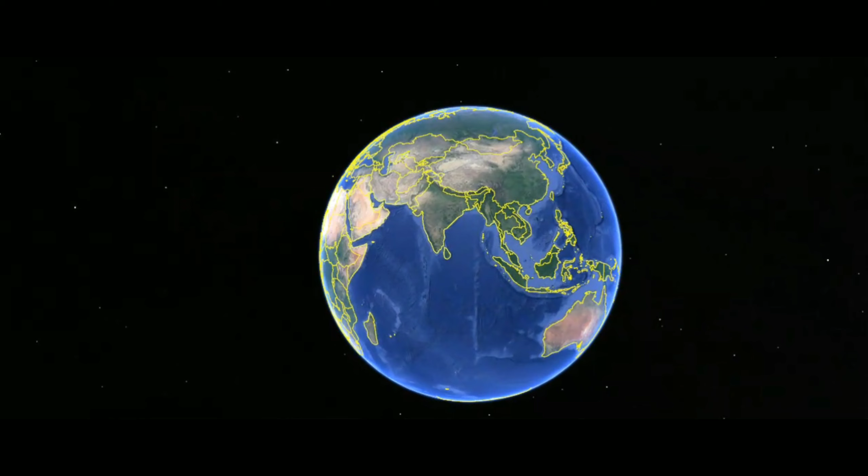Today I am coming with a new update, the 12,000 crore Surat Metro project. Before going to the project, let's know about Surat city. Surat is located in the western part of Gujarat, and it is the second largest city in Gujarat after Ahmedabad. It is the 8th largest city in India by population. Surat is also called the economic powerhouse of Gujarat. The economy is based mainly on two industries: number 1, textile industry, and number 2, diamond cutting and polishing industry. As per 2011 census data, the Surat population was 44.67 lakh, but it officially reached 69.36 lakh in 2021.

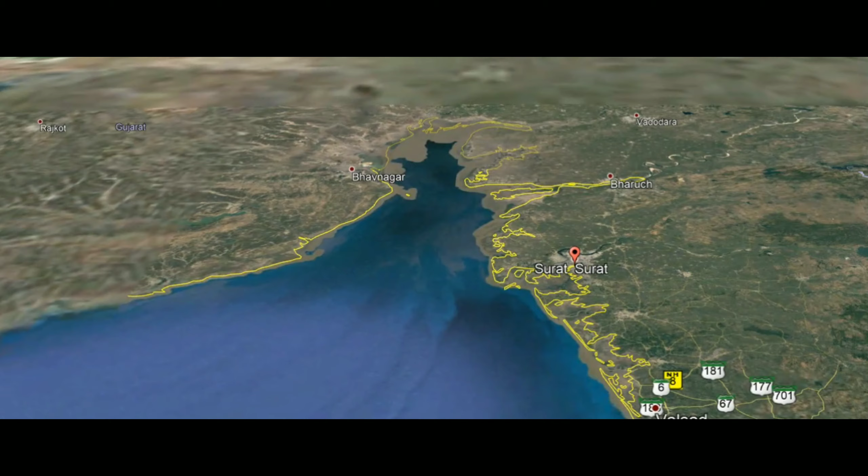The area containing Surat was 326.515 square kilometers. The population density was 13,680 persons per square kilometer, and Surat is one of the fast growing cities in India. It contains 7 zones, 29 wards, and 116 councillors.

Now let's know about the Surat Metro project. On 18 January 2021, Prime Minister Narendra Modi inaugurated the foundation stone virtually.

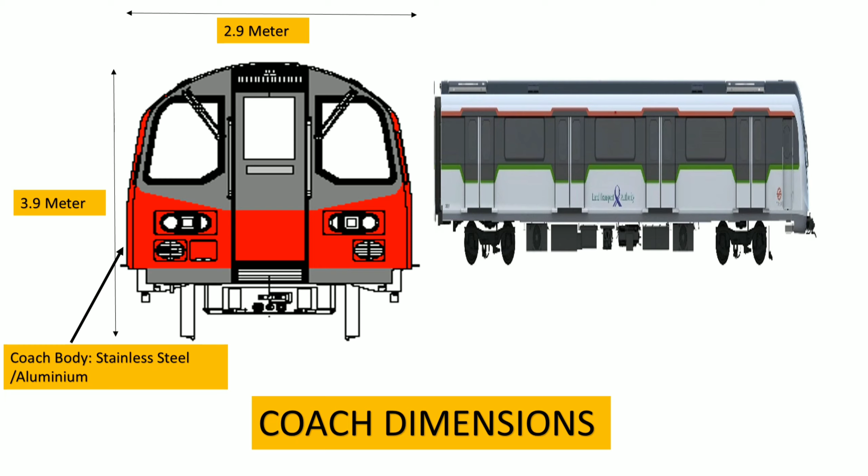Now let's go into the project features. Starting with the coach dimensions of the metro rail: 3.9 meters height and 2.9 meters width, and the length will be 21.64 meters or 21.34 meters. The coach body will be made either of stainless steel or aluminium.

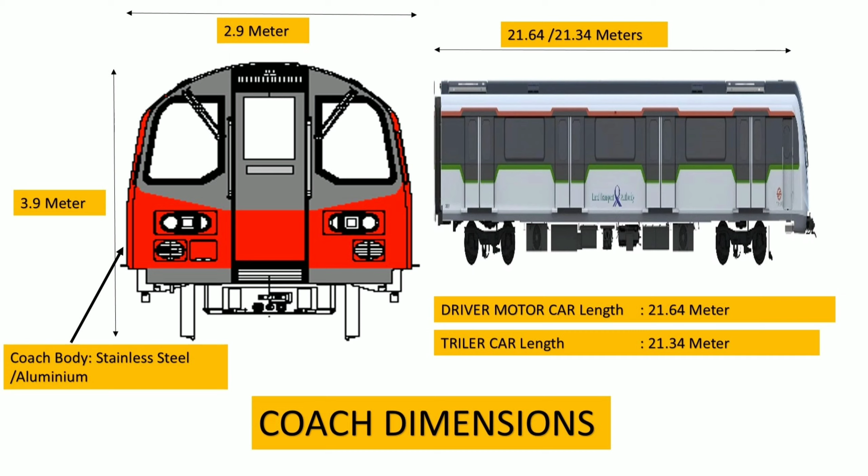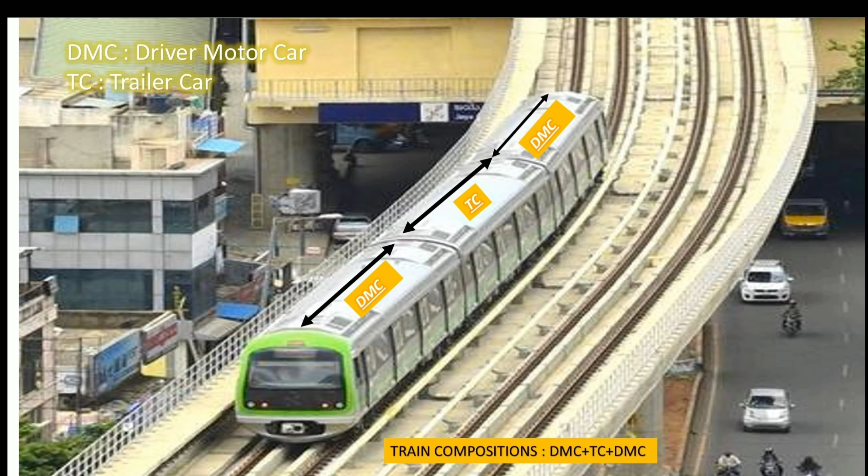Coming to the axle load capacity of the coach, it will be 16 tons. The train composition will mainly be 3 cars: 2 DMCs and 1 TC. DMC is nothing but driver motor car, and TC is the trailer car.

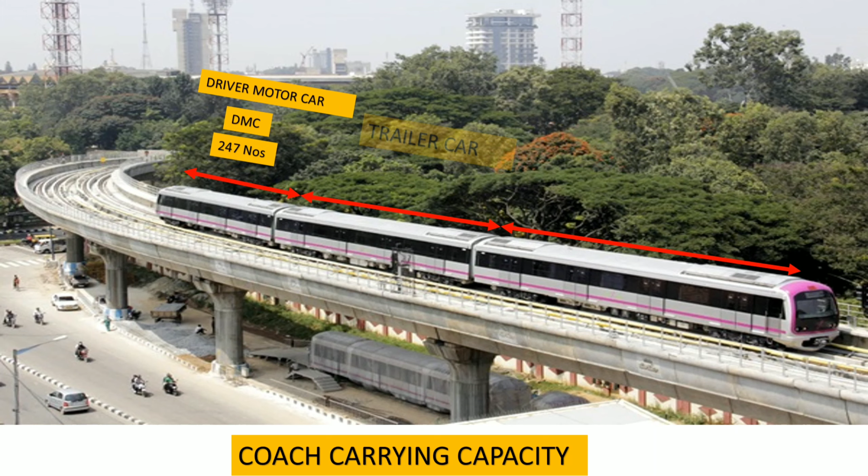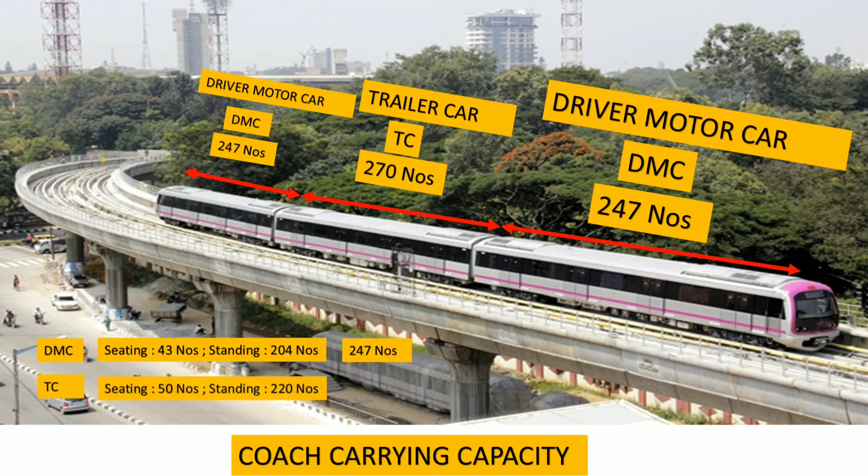Coming to coach carrying capacity, the DMC will carry 247 passengers, including 43 sitting and 204 standing. Similarly, the trailer car capacity will be 270, with 50 sitting and 220 standing.

The gauge involved in this project is standard gauge of length 1.435 meters. The total capacity of passengers in 3 coaches will be 764 numbers, including 136 sitting and 628 standing.

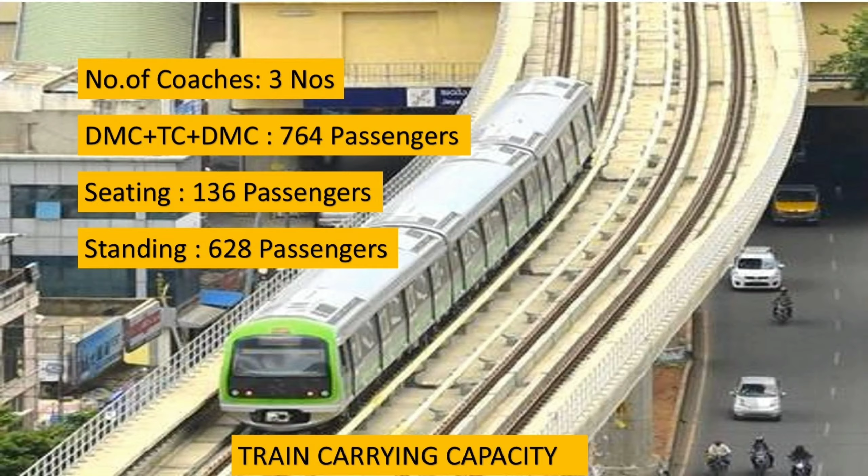Coming to the train speed, the maximum design speed will be 90 kmph and the maximum operational speed will be 80 kmph, but the scheduled speed will be 33 kmph for the entire project. Station dwell time will be 30 seconds. Dwell time is the time required for a train to stop at a platform to allow passengers.

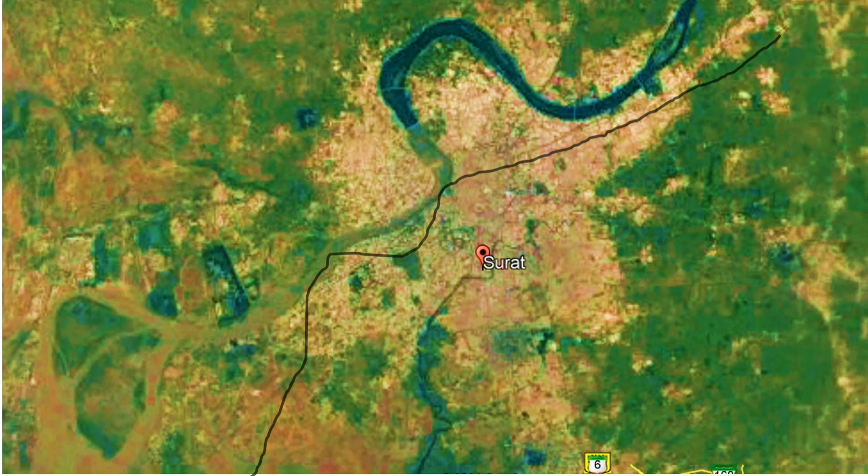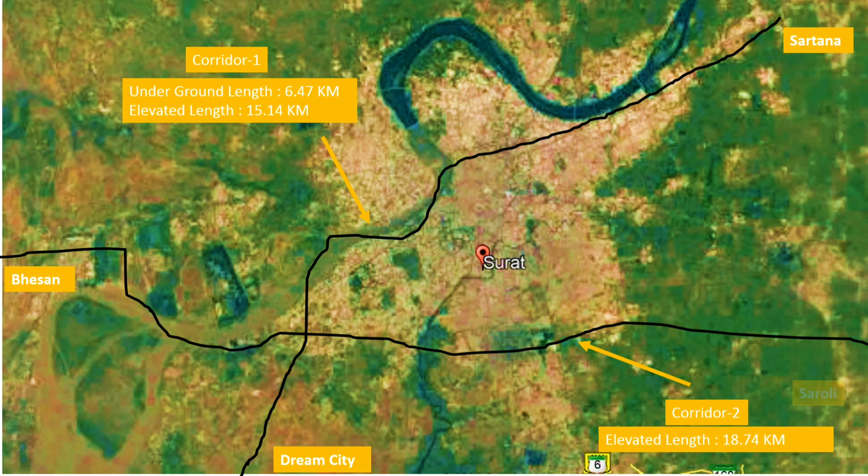The phase 1 project will be constructed mainly in 2 corridors. Corridor 1 runs from Sartana to Dream City with a length of 21.61 kilometers, and Corridor 2 runs from Bhesan to Saroli with a length of 18.74 kilometers.

Corridor 1 is constructed via underground for 6.47 km and elevated for 15.14 km, while Corridor 2 is mainly constructed in elevated portion with a length of 18.74 km. Corridor 1 contains 20 stations.

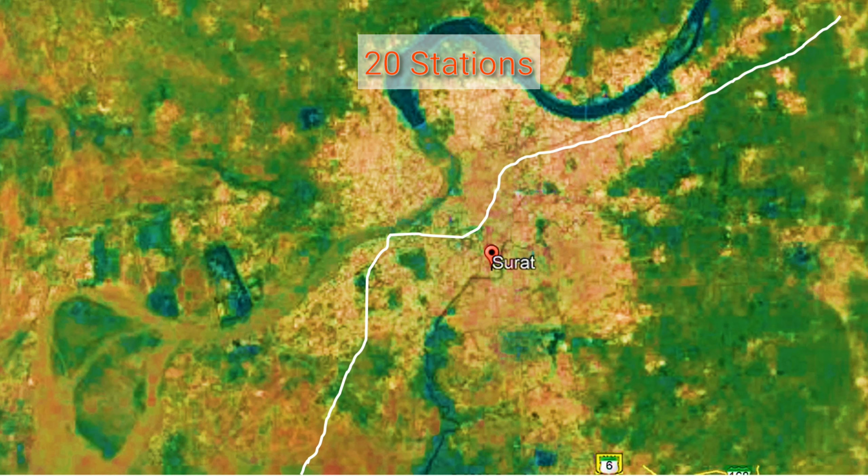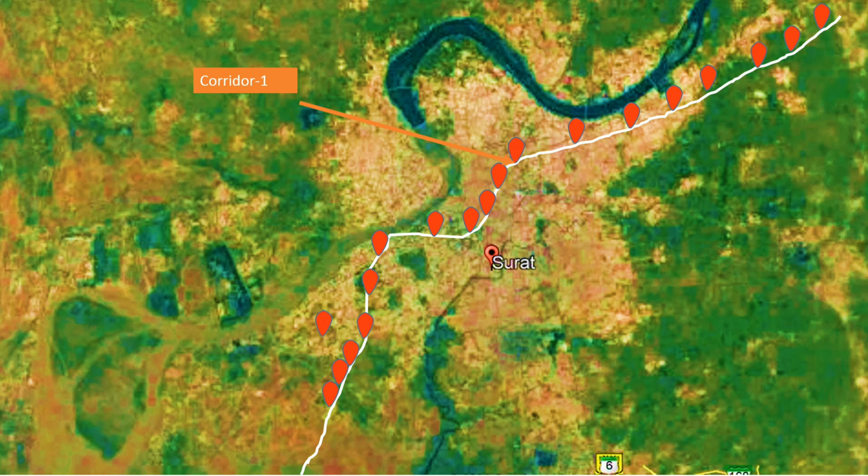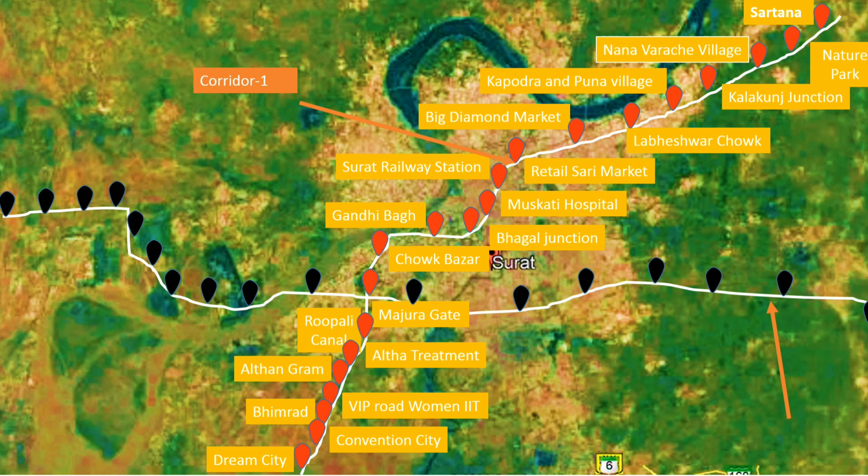Corridor 2 contains 18 stations. It will start at Bhesan and go through Botanical Garden, Ugat, Palanpur Road, LP Savani School, Art Center, Adajan Gam, Aquarium, Badri Narayan Temple, Athwa Chopati, Majura Gate 2, Udhana Darwaja, Kamela Darwaza, Anjana Farm, Model Town, Magob, Bharat Cancer Hospital, and close at Saroli.

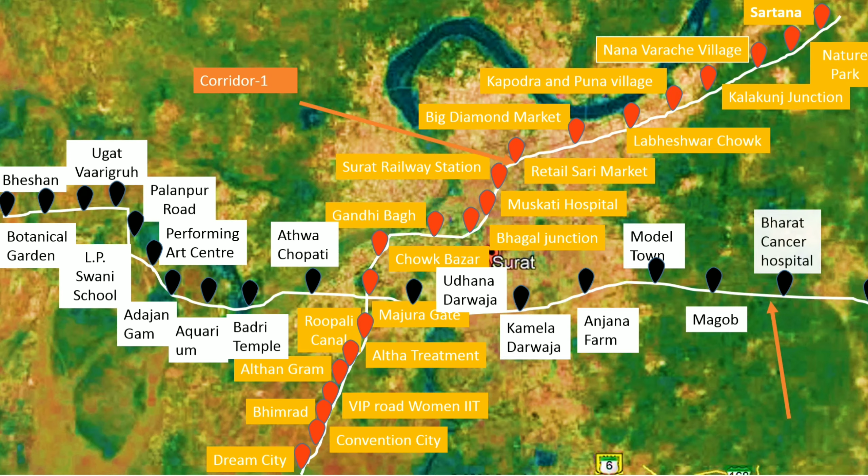The total train operation is 19 hours per day. The starting time will be 5 am and it closes at 12 am midnight. This project contains two maintenance depots, one located at Dream City and another at Bhesan.